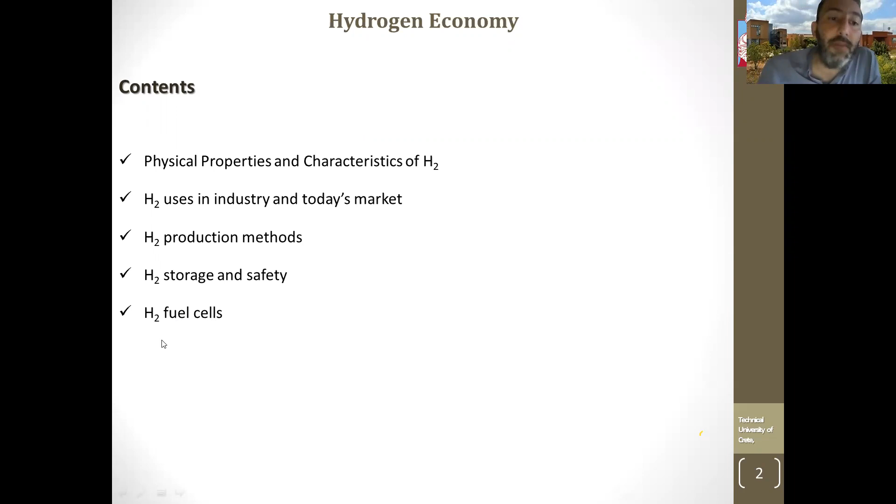So we will first begin with the physical properties and characteristics of hydrogen. We will then move on to the hydrogen uses in industry and today's market, and we will see that hydrogen is already out there. It is not something new. We will review the basic production methods, not only in small scale, but in larger commercial scales, from 2000 until now. A few things on storage and safety, which is sometimes the big concern, the big question of the safety of operating hydrogen fuel cells, and I will close with two cases.

The first is to see how hydrogen is being incorporated into vehicles. We will see a real case of the Toyota Mirai, which is an actual vehicle that is on the road in Central Europe. And also, I have included, as of a couple of days ago, the hydrogen vision in Greece that also includes our island, Crete.

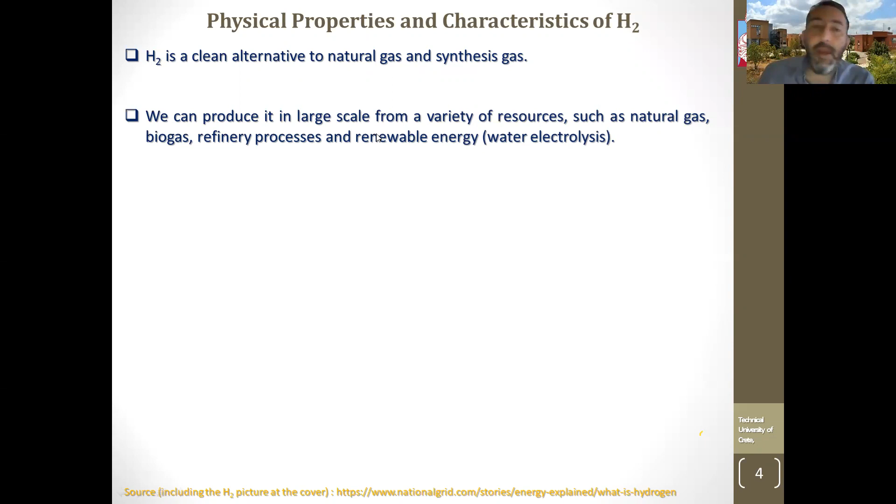So let's move now to basic stuff on what is hydrogen. Hydrogen is a clean alternative to natural gas and synthesis gas. Natural gas, we can say, is more than 90% methane, and synthesis gas is a mixture of hydrogen and carbon monoxide. Hydrogen can be produced in large scale from various sources like natural gas, biogas, refinery processes, and from water powered by renewable energy sources.

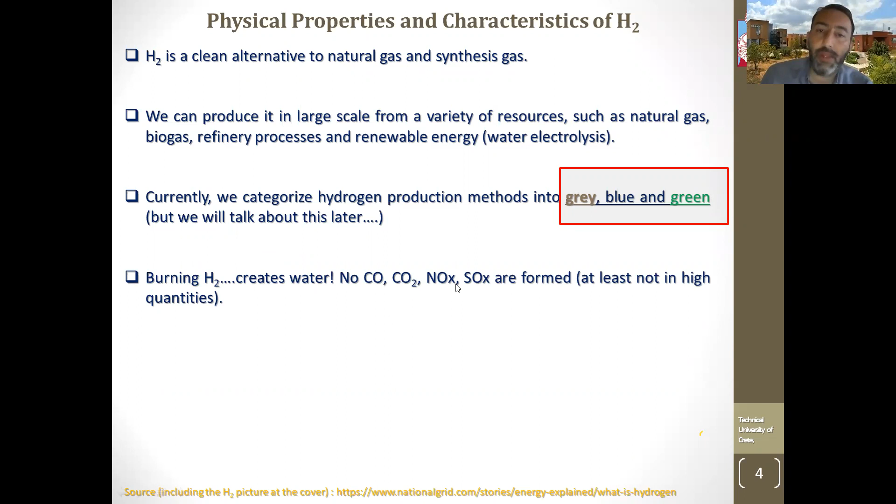Currently, we categorize hydrogen into three colors, but we will review them later. You can see the three colors here, but there are an extra 4 colors. Burning hydrogen, of course, creates water. Hydrogen plus oxygen gives only water as the main product. There is no formation of oxides of carbon like monoxide or dioxide, or oxides of nitrogen or sulfur. At least they're not produced in high quantities when we are using clean hydrogen as the main component.

Hydrogen can be transported through gas pipelines, as is the case with natural gas in big cities, in big infrastructures. However, the last bullet on this introductory slide is that economics are quite high already. Now, this is a basic picture of hydrogen that is usually taught in schools. Hydrogen is a gas. It is a light element. It has a very low density. You can see the different values here for boiling point, molecular weight, colorless, odorless, and other stuff that this type

of light gases have. Two main features for someone that starts to work with hydrogen: hydrogen is nearly everywhere. It can be found in 75% of all normal matter, but you cannot find it alone. You cannot, for example, open a cave or a house, I'm kidding, and find hydrogen. Hydrogen is found only in other substances. It is inside water, methane, methanol, gasoline, ethanol, diesel, alcohols, and all hydrocarbons.

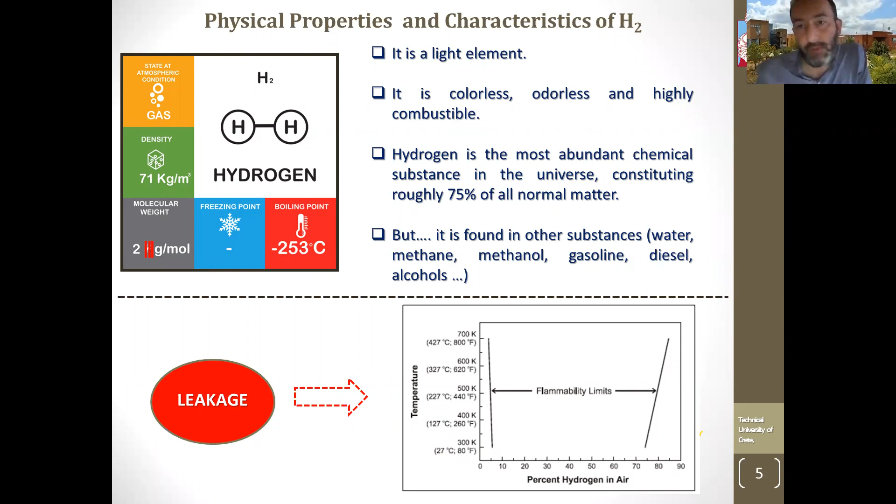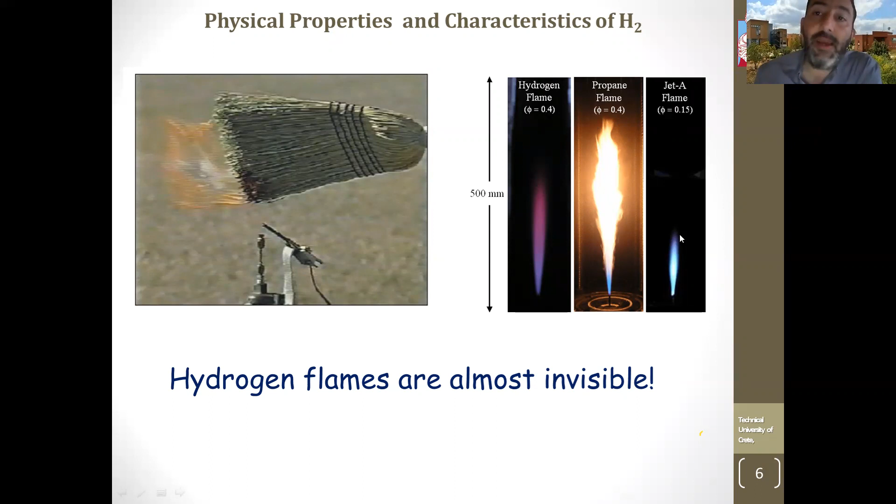compared to the percentage of hydrogen. So in order for an accident to happen, we need to put hydrogen in a very small place where it will increase in concentration. So we should not be afraid all the time about hydrogen leakage. Of course, this doesn't mean that we should not have any safety measures. Here are two examples of hydrogen flames. You can see that it is almost invisible. Here I have a hydrogen flame on the left, a propane flame, and a jet flame. Hydrogen flames are something between propane and jet fuel aviation flames.

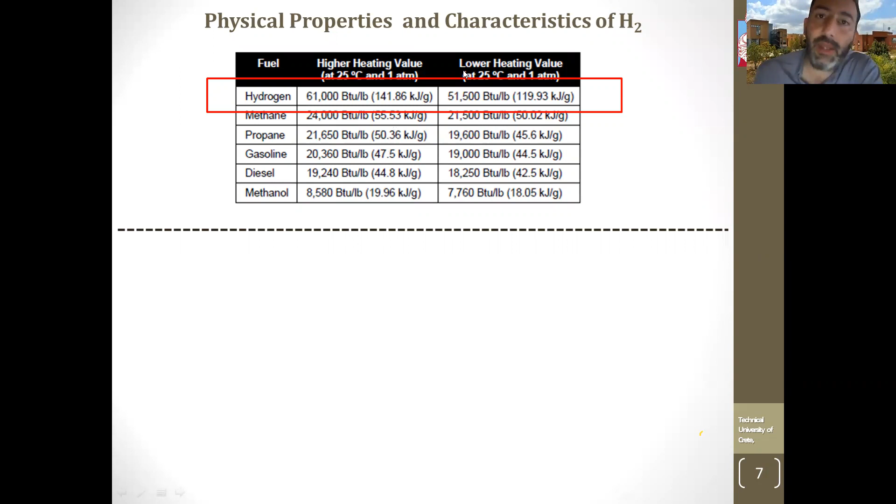So let's see some characteristics of hydrogen compared to other fuels. I have selected hydrogen to be compared at the higher heating value and lower heating value as kilojoules, energy per gram. In the bottom half of the slide, I will show the same table regarding density. If I take the energy per gram of hydrogen, it is the highest value, either higher or lower heating value, compared to methane, propane, and more importantly gasoline and diesel, the main fuels for transportation. The difference is more than 3 times.

If I now compare the energy density of hydrogen, meaning energy per cubic meter, hydrogen has a very low value compared to gasoline and diesel. These two motor fuels are about 30 million kilojoules per cubic meter, while hydrogen goes up to 4.5 million kilojoules per cubic meter, only if it is compressed at about 690 barg. And this will be the case with vehicular applications.

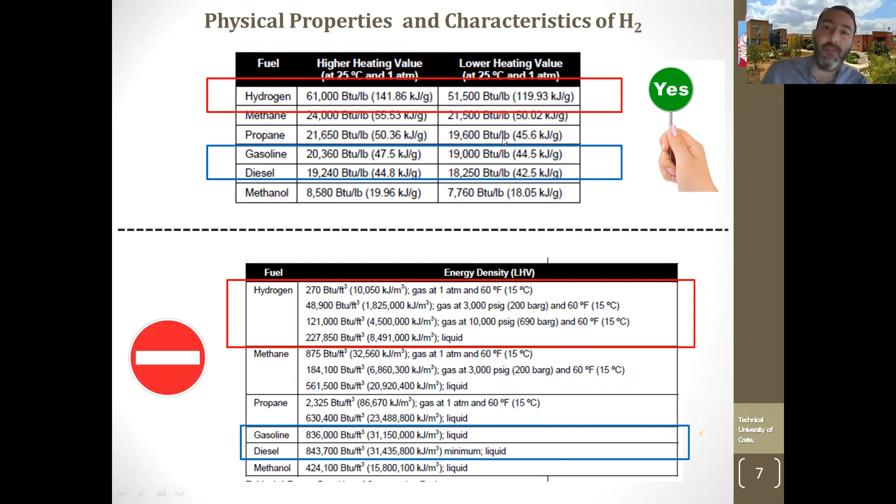In order to have hydrogen in vehicles, I must have a tank filled with hydrogen at a pressure that reaches 690 barg. Even in this case, gasoline and diesel, which are liquid fuels, have higher energy density. So if I have to compare something per mass, hydrogen receives a good credit point. Now, if I want to compare, I will put this somewhere around here.

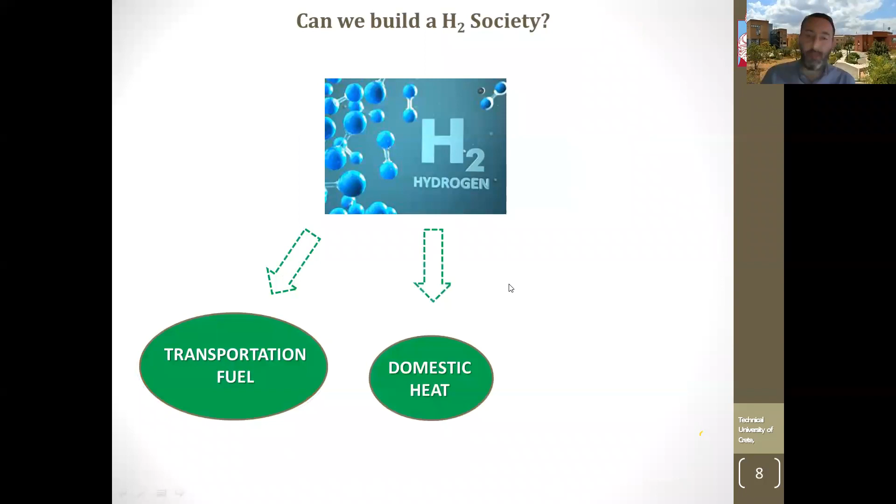If we need to build a hydrogen society, we must consider hydrogen to take part as a leading role in 3 different things. Hydrogen should be used as transportation fuel. It should be used as an energy medium or a heat medium for domestic heat supply. And also it should be used as the main component, the raw material, to provide high added value chemicals.

So in order to build something that is called hydrogen society or hydrogen economy, hydrogen should take part in all of these 3 sectors: transportation, domestic heat, and also industry, chemical industry, refineries, and so on.

In this way, if we can manage to build this hydrogen industry, we will first start with the production of hydrogen, and these are different types of pictures that we will explain later. Hydrogen should be produced through an economic way, for example, through renewable energy sources.

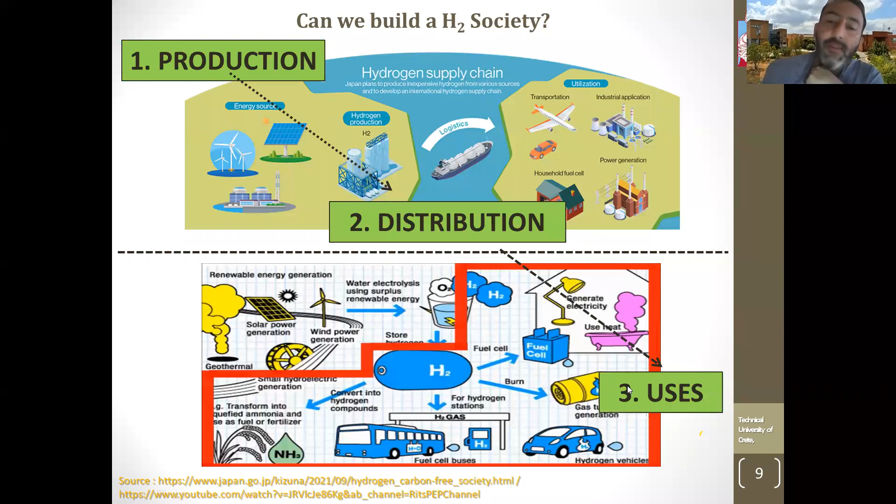It will be stored, and then it should be distributed either through tanks, big trucks, or city pipelines, transported in order to be used in these three sectors that we discussed: transportation, industrial, household, and so on. So a hydrogen society should have production, distribution, and uses as actual roles for hydrogen.

What are the main hydrogen uses in today's sector? We start with power and heat generation. It can be used for power generation to supply energy and power to the grid. Hydrogen addition to natural gas, for example, blending hydrogen into natural gas pipelines.

From what I have heard, because I'm not an expert, 5 to 10% of hydrogen can be introduced to the gas pipelines. And this hydrogen can provide heat for buildings and industry.

In industry now, it is used for ammonia production, steel production, synthesis gas, and refinery processes dealing with hydrodesulfurization, hydrocracking, hydrogenation.

And as we will discuss at the end of today's lecture, it can be used in hydrogen vehicles. Currently, but this number is increasing, this accounts for about 10% of global hydrogen consumption if I take into account the energy production.

Now here is a spider diagram that I found on the internet, and I really like to use. We see here at the heart of this diagram the hydrogen. At the beginning, as we said, we need to produce hydrogen. We have, for example, renewable sources, nuclear power.

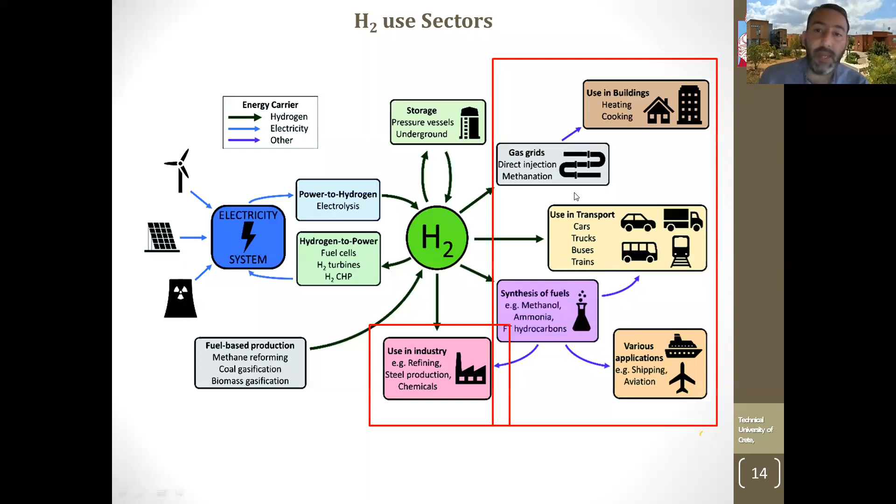We can take hydrogen from methane reforming, coal gasification. We'll take a minute to see what these processes and technologies refer to, hydrogen electrolysis and so on. Storage either in vessels, in liquid form, gaseous form, or in metal hydrides. And then we have the uses in buildings, gas grids, transportation, synthesis of fuels, and so on.

Here, based on what we discussed earlier, are some numbers regarding the potential hydrogen production starting from 2020 and for the next 30 years. Governments, the European Union, and some other global organizations say that in 2050, we will have to build a society that will be net zero, meaning no carbon emissions.

You can see different sources of the material that I've been using in this lecture, so you can also check some other numbers. We can see here the different colors as they refer to refining, industry, transport, and so on, that will increase the hydrogen demand over the next 30 years.

These are two scenarios. The right-hand side refers to no carbon emissions, while the left-hand side means that we will have some carbon emissions, but as little as possible. And we can see that in both scenarios, in order to achieve this low or net zero emission, we need to increase hydrogen production, and not only increase hydrogen production, but use hydrogen in these different sectors that we can see.

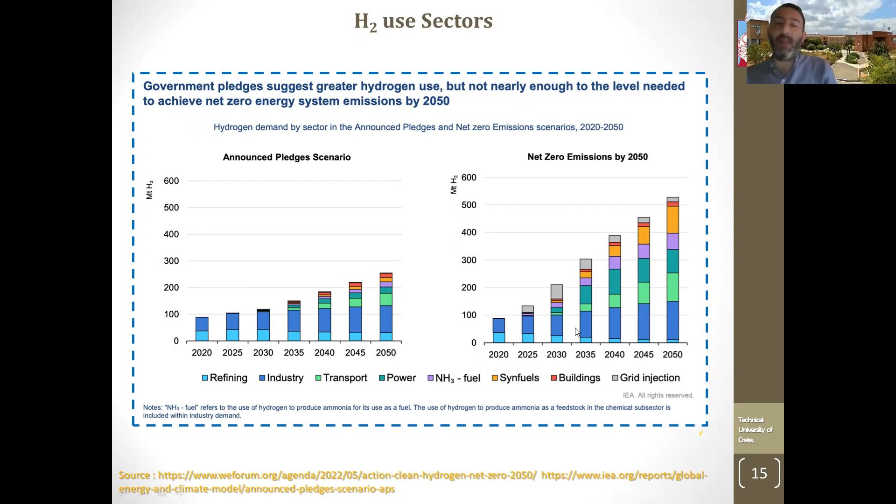Now let's see if hydrogen can be used in more fascinating applications, like hydrogen in space, in islands, or even in a laptop.

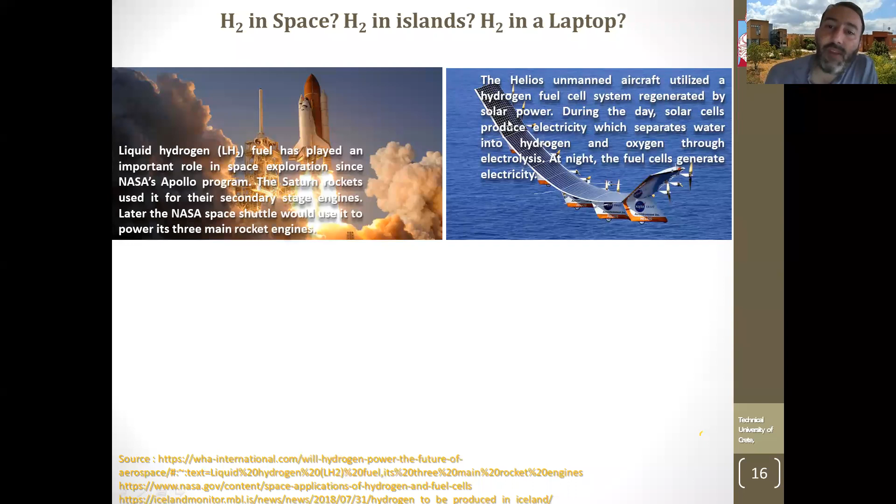Now, this is very strange, it looks like a big bird. This is the Helios, from the Greek word describing sun, an unmanned aircraft that utilizes a fuel cell system powered by hydrogen, and this hydrogen is provided by solar power. So during the day, solar cells can operate this unmanned aircraft, while at night the fuel cell can generate electricity with the hydrogen that is being produced.

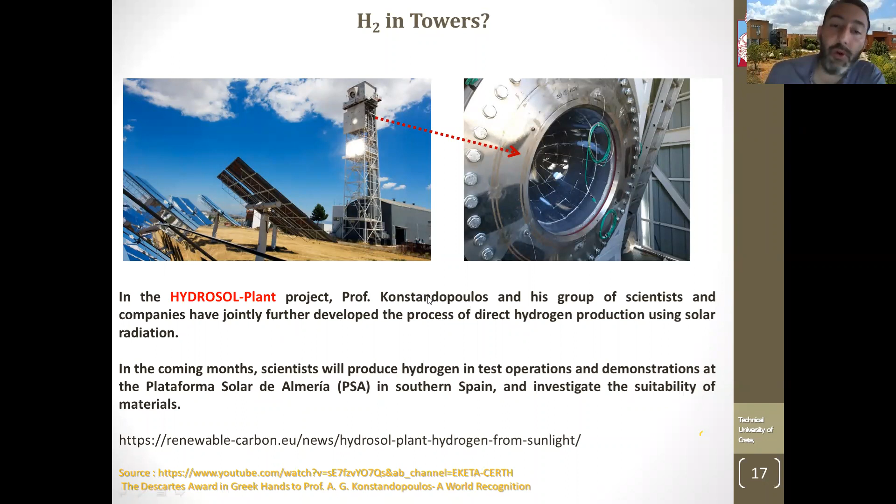It is a very efficient way to produce hydrogen from solar water splitting. And this plant, the hydrosol plant, you can see the different details here, has received numerous awards for Professor Konstandopoulos, a Greek professor in Thessaloniki. Other sectors include food, metalworking, welding, float glass, medical, and so on.

Now, let's go a bit quickly over the hydrogen production routes. And I say quickly because if we needed to stay at each of these technologies, we may need one seminar alone. Steam reforming is the basic hydrogen production route. Methane and water are put together in an endothermic reaction to produce CO, CO2, and hydrogen. This is the main hydrogen route, I'm repeating, for today's market.

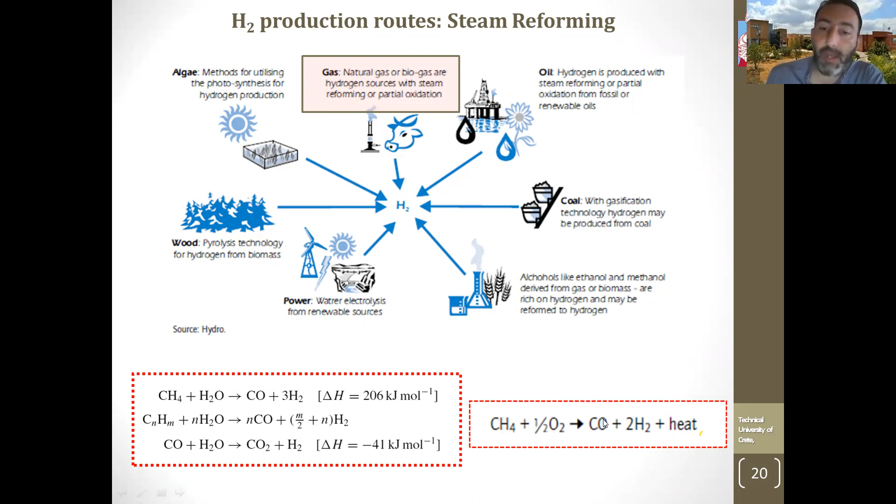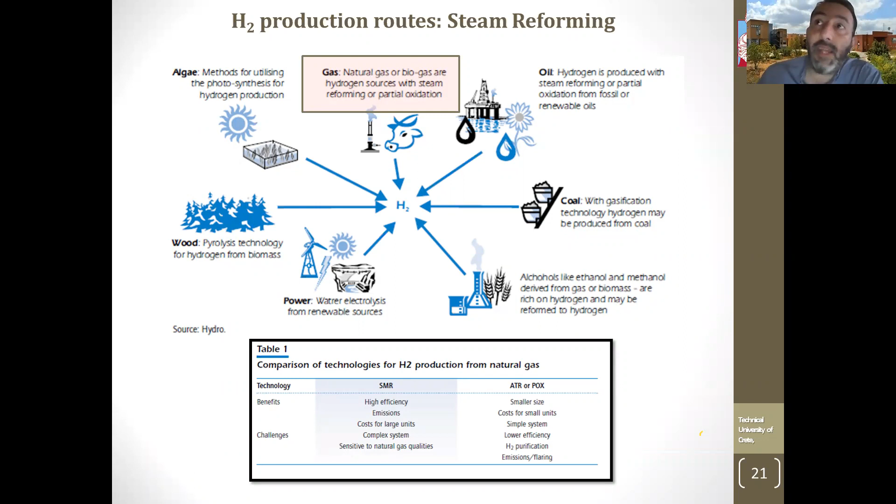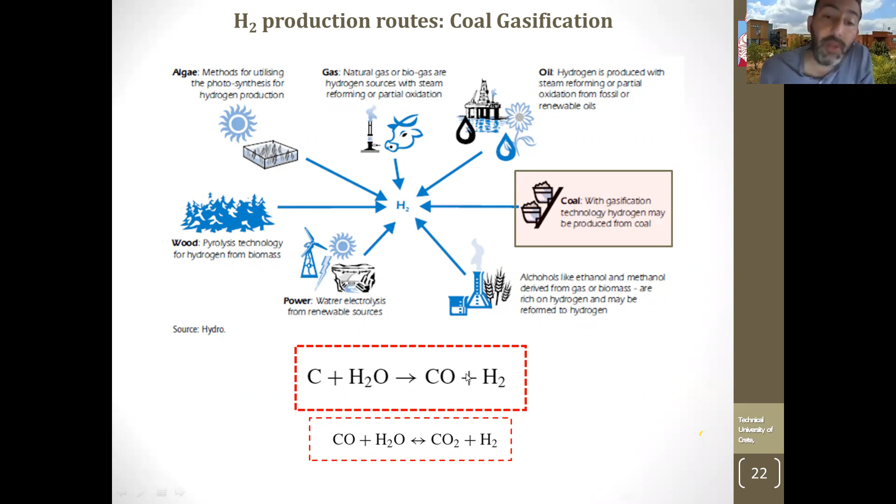An alternative is the partial oxidation of methane that provides CO and hydrogen, and of course it is an exothermic process. Here are some very few details. Steam reforming takes place commercially, at large scales. It is something quite known. It is a catalytic process, so a lot of effort, a lot of research is being done there on providing good catalysts. Coal gasification is another way. Coal, besides other components, has a big percentage of carbon. Through water, coal gasification can lead to CO and hydrogen as well.

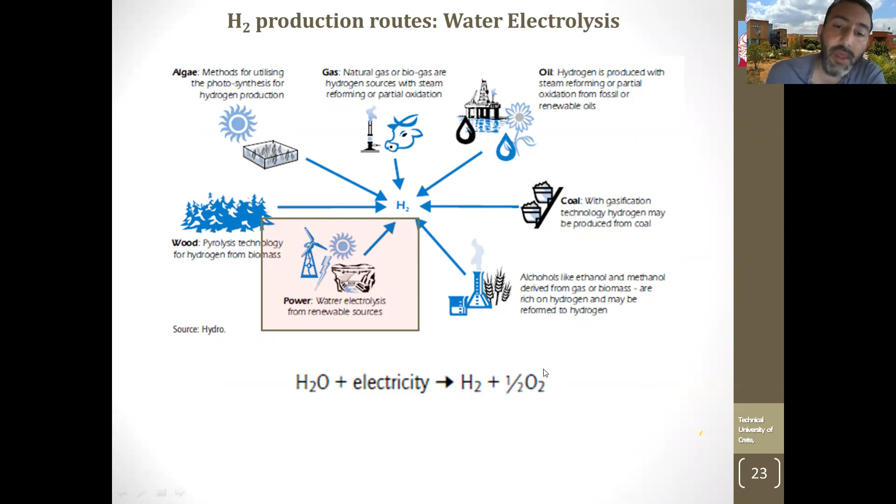Power electrolysis is, let's say, the green process where water and electricity are combined in order to provide hydrogen. You can see that there are no emissions besides oxygen. Now, for an electrolyzer, I will say a few words, if you don't mind. An electrolyzer is an electrochemical machine or an electrochemical reactor. It has two compartments. I will start with the proton exchange membrane. We have the anode, the membrane, and the cathode. Water, through the provision of electricity, you can see the reactions over here at this table.

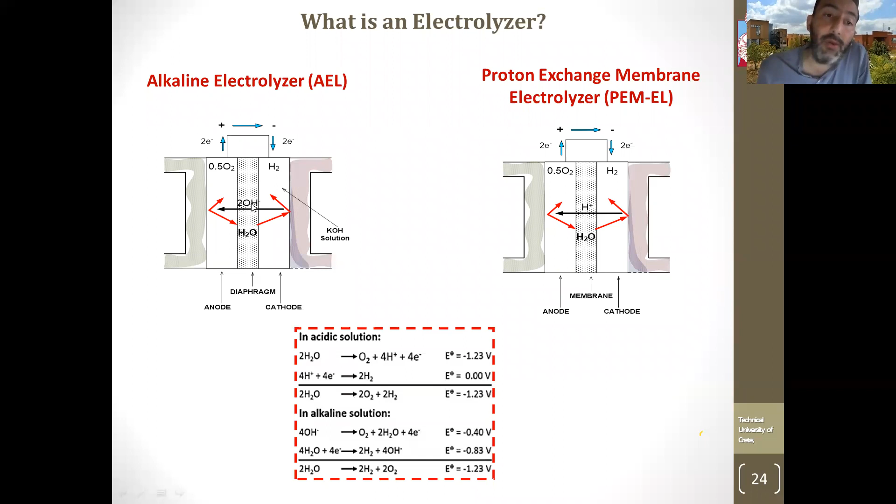Water is split into hydrogen and oxygen in the form of ions, protons and oxygen ions. Through the membrane, only the protons can pass to the other side. And of course, I need electricity in order to split water into these components. The difference with the alkaline electrolyzer lies in the membrane, this diaphragm that allows the hydroxide ions to pass from the cathode to the anode. So this is the main way to produce hydrogen from renewable energy sources.

So if I have an electrolyzer with water inside, I can power the electrolyzer, split water into hydrogen and use it. Another renewable energy source can be, for example, wood or other things that are thrown away in the agricultural industry. And pyrolysis, I have used the example of methane. Pyrolysis means that I provide heat only, without air, and split components, for example into carbon and hydrogen in the case of methane. In this way, pyrolysis is like splitting a component into its main constituents.

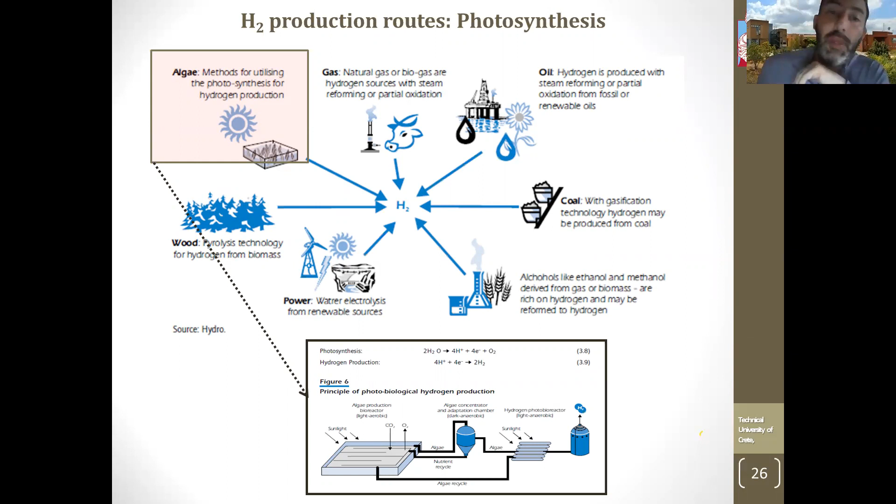A very futuristic and fascinating hydrogen production route refers to photosynthesis for hydrogen production through biological processes. This is still in progress, but if some of you have more interest in this process, you can review it in the numerous videos that exist. It is a good technique, however, it still needs a lot of time to develop and provide a commercial application.

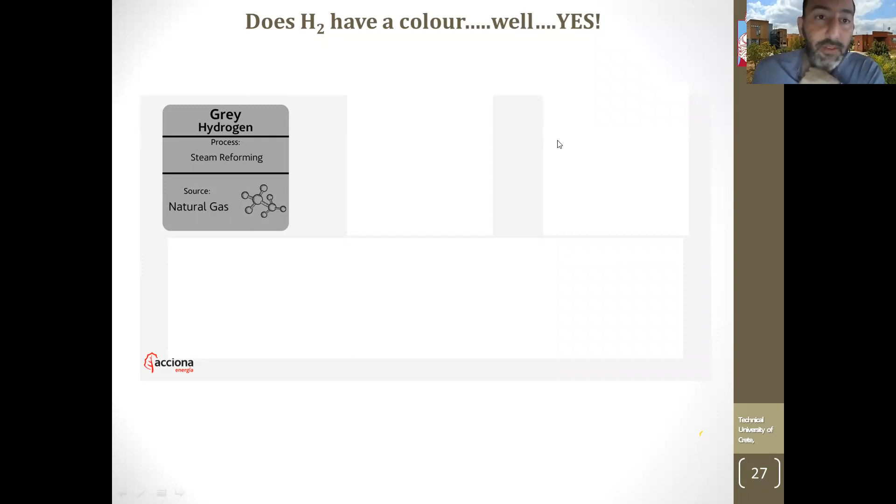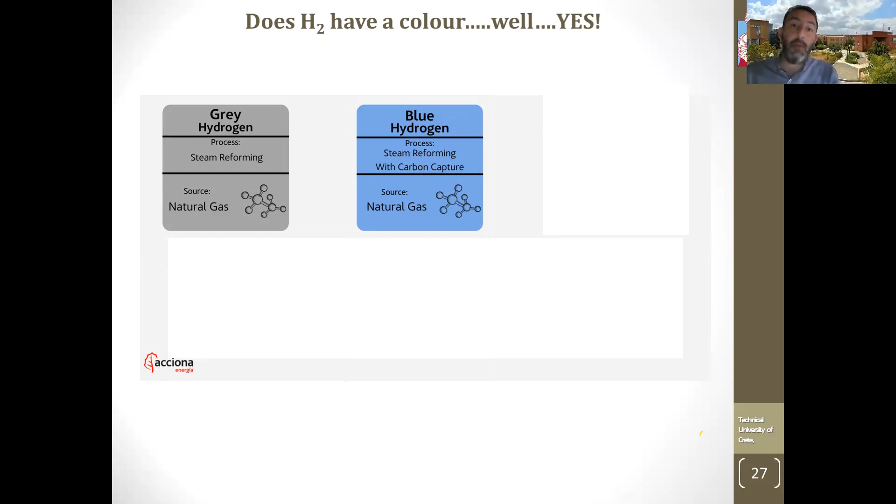Here we have the different colors of hydrogen. Does hydrogen have a color? Well, the answer is yes. We have gray hydrogen when hydrogen is produced from natural gas steam reforming. When it is produced from steam reforming but the CO2, the carbon dioxide that is produced, is captured, then we are talking about blue hydrogen. And green hydrogen comes from the process of electrolysis powered by renewable energy sources.

Now, for every kilo of hydrogen produced, more than 10 kilos of CO2 are being emitted to the atmosphere. So this means that with gray hydrogen production, I emit a lot of CO2 to the atmosphere. Also, if I use gray hydrogen production, this means that I will use natural gas, which is quite expensive, at least the last 12 months for different geopolitical reasons. We can say that natural gas prices have increased. 1 kilo of hydrogen requires more than 4 kilos of natural gas. So if we need to proceed with a hydrogen economy, my opinion is to move to blue and green hydrogen.

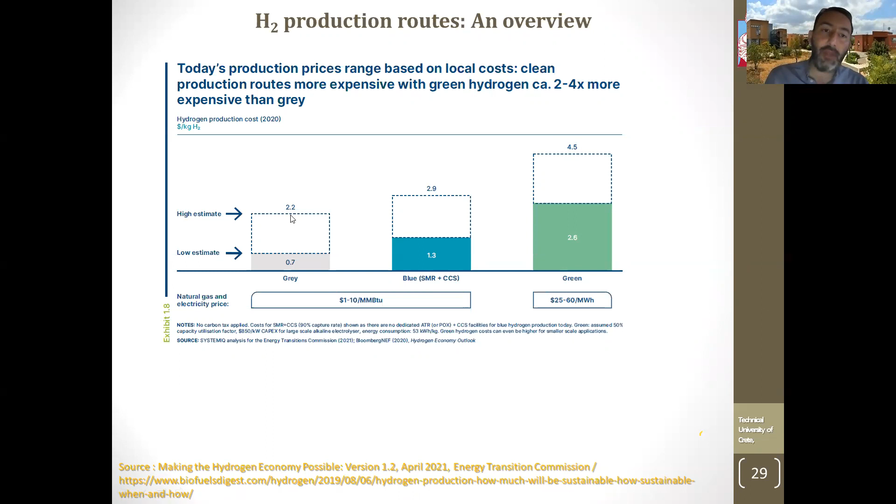And here are some cost relations to the processes that I referred to. We can see here that gray hydrogen is about $2 per kilo, and this refers not to the actual production cost, because there are also other costs regarding transportation, storage, and so on. This is, let's say, a basic production cost from the gray process, $2.2, 2.9 if I include carbon capture and storage, and 4.5 if I move to the green process powered by solar and wind energy. So we can say that we need to spend at least 2 to 3 times more money in order to move from conventional methane reforming to green hydrogen production.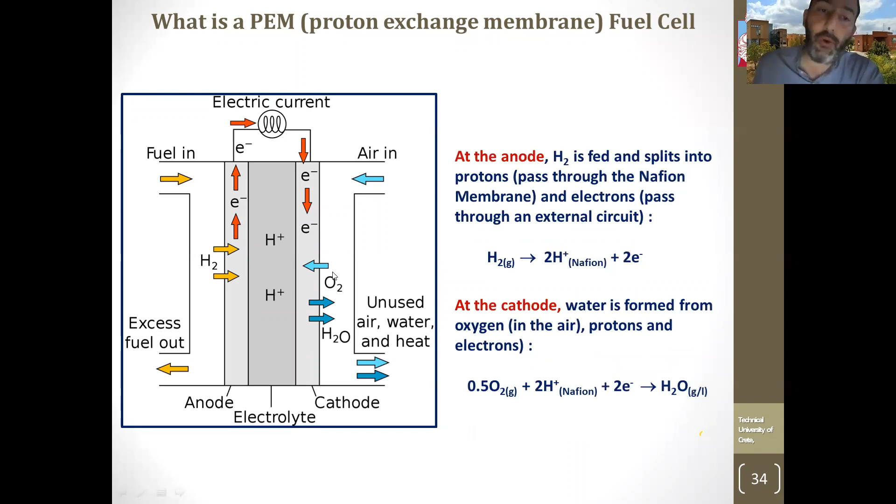I need a couple of slides to make an introduction to the PEM fuel cell, because I will use this technology, which is the reverse of the water electrolyzer, because I will move to the case of the Toyota Mirai. Now, what is a fuel cell? In the fuel cell, again, I have the electrolyte, the anode, and the cathode. Here, I provide hydrogen to the anode. Hydrogen is split into hydrogen protons that can pass through the membrane to the other side, where there is the supply of air, and electrons pass through an external electric circuit. Passing electrons, moving of electrons, transportation of electrons, we can use any other word, means that I have electrical current. Electrical current means electrical power or energy production.

This is what happens at the anode, the splitting of hydrogen into protons and electrons, and this is what happens at the cathode: oxygen, along with protons and electrons, provides water. So from one side, I have hydrogen, from the other, I have air, oxygen is included in the air, and what do I take at the outside? Water, which is, let's say, quite a peaceful product, and also electricity.

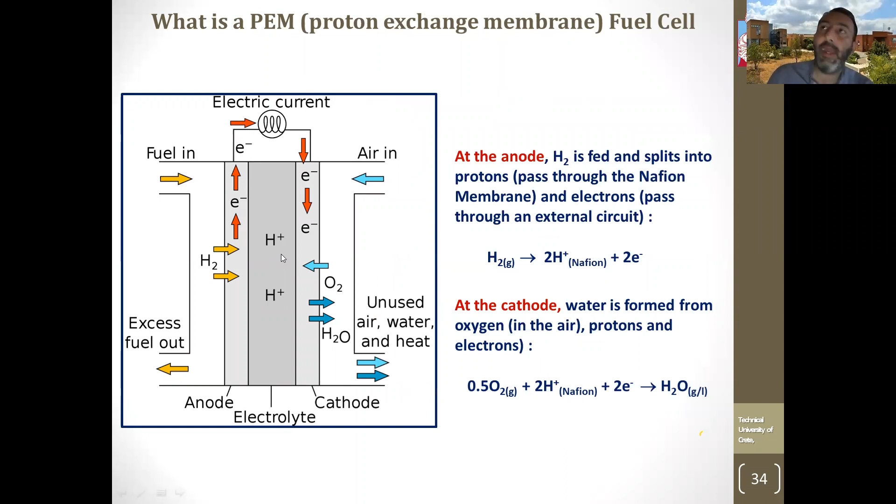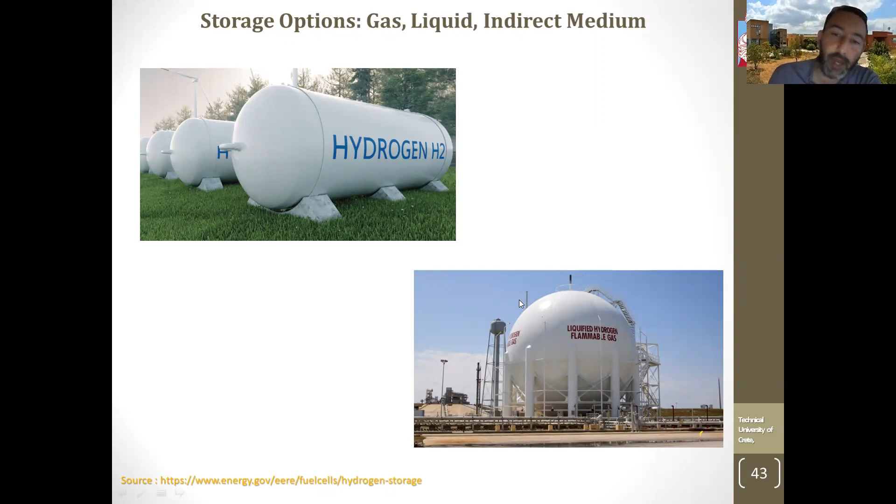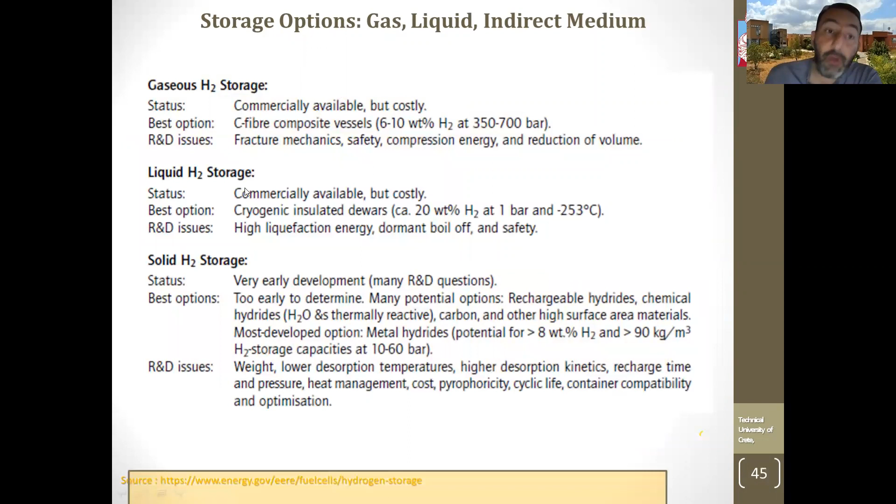Here is what hydrogen storage looks like in gaseous form, and this is how hydrogen is being stored in liquid form. Some, let's say, comparison between gaseous, liquid, and solid hydrogen storage. Basically, the gaseous storage is commercially available. For the liquid storage, we can find it commercially, but it is still costly. We need very good insulation dewars. These are the dewar tanks, as they are being called.

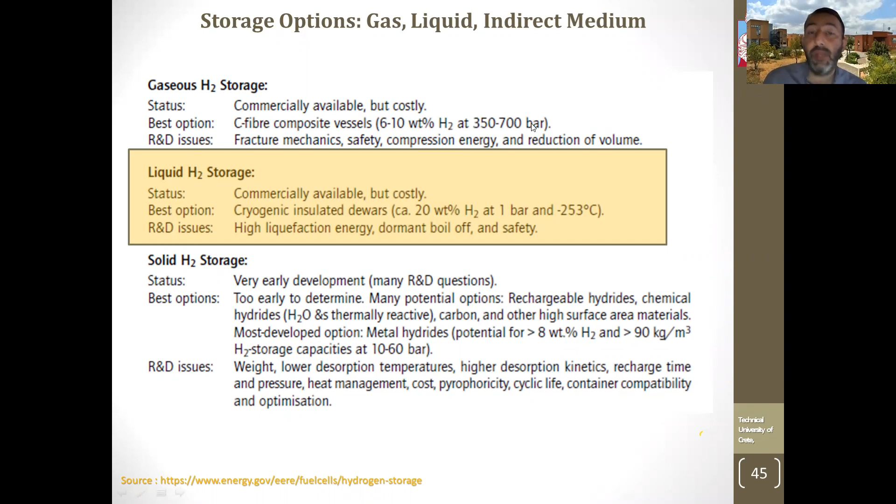Here you can see in the first case that hydrogen is being stored up to 700 bar. Here you can store it at atmospheric pressure, but at very low temperature. And this is something that I said earlier, that we are, let's say, in R&D development. There are a lot of things to do in order to make it public.

So after this introduction, I have given you, I know, a lot of details, but I have not gone very far into details for the different technologies. So I have selected something that I think that you will like. This is an actual car that is not under design, but it is operating, as I said in the beginning, in Central and Northern Europe.

This is a Toyota Mirai, which is a fuel cell vehicle that uses hydrogen as the main fuel, the energy medium that generates electricity and powers the vehicle. We will see everything that we need to know inside this car. This information is not classified. You can find it on the internet, and I have here the manual for you to review it.

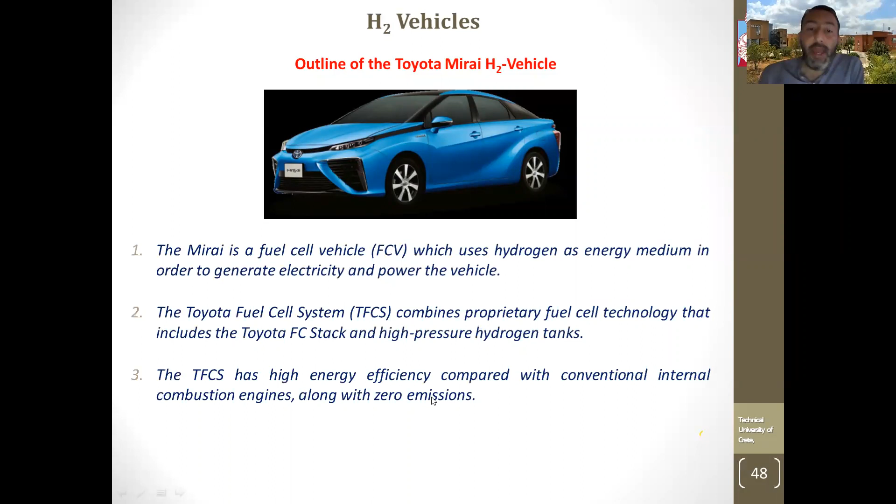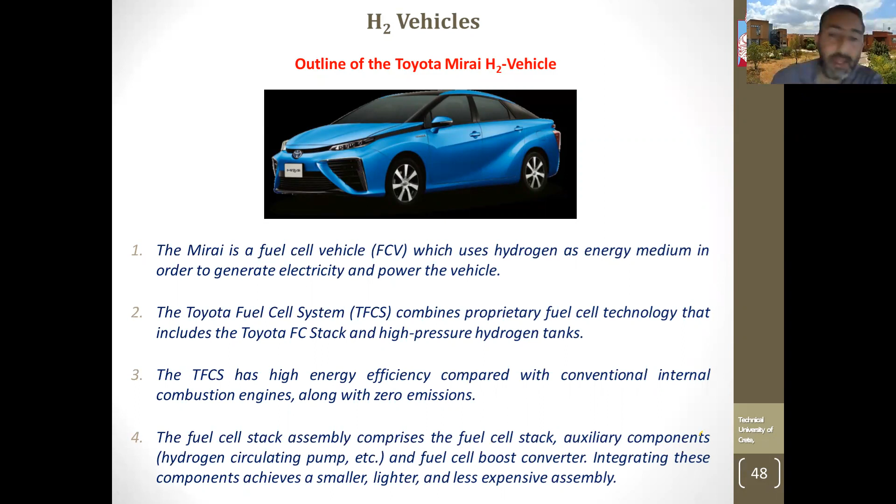Underneath the seat of the driver is the fuel cell stack, which gives a maximum output of 155 horsepower, if you need to compare it with actual values of your car, your parents' car, your friend's car, and so on. So underneath the seat of the driver is the fuel cell.

The motor, as in conventional vehicles, is in the front of the car. This is an electric motor because it is driven by electricity provided by the fuel cell. It is an electric car. It is not operating on batteries, as we know, for example, Tesla and many other vehicles operating with batteries. This car operates with hydrogen and an electric motor.

The battery is at the back side, down the passenger's seat. It is a NiMH, a nickel metal hydride battery, that has the same application, stores energy and receives energy during the braking of the car. Of course, since we have an electric motor, we need some boost converters in order to increase the voltage provided by the fuel cell, and also some control units, because it is a very expensive car. We need to take into account humidification, how oxygen and hydrogen are being supplied to the fuel cell.

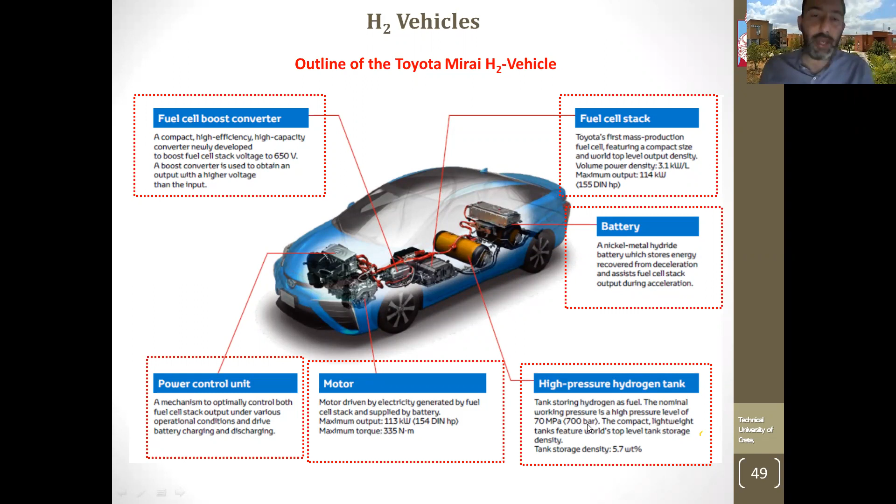How this car operates: we start with step one. Air is being introduced through these holes in the car, goes up to the middle of the car, inside the fuel cell. Here is the fuel cell stack. Here we have the hydrogen pressure tank at the point that I mentioned earlier. So hydrogen and oxygen are being combined in order to provide power, electricity to drive the motor, along with electricity from the battery or to the battery. And how hydrogen is being refueled, we will see later. And the last part is what is emitted from the car, which is basically pure water.

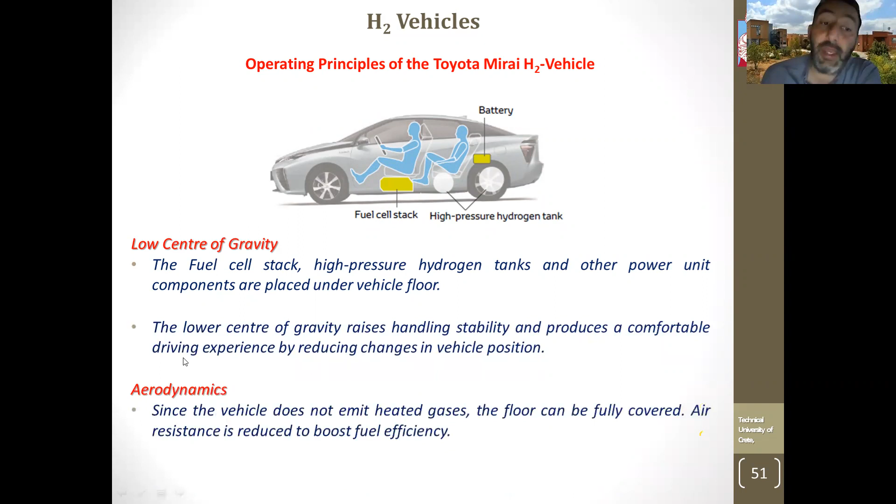As Toyota claims, we can see how the inside now looks with two passengers. This is the battery, the hydrogen pressure tank, and the fuel cell. It provides a low center of gravity. It has good aerodynamics.

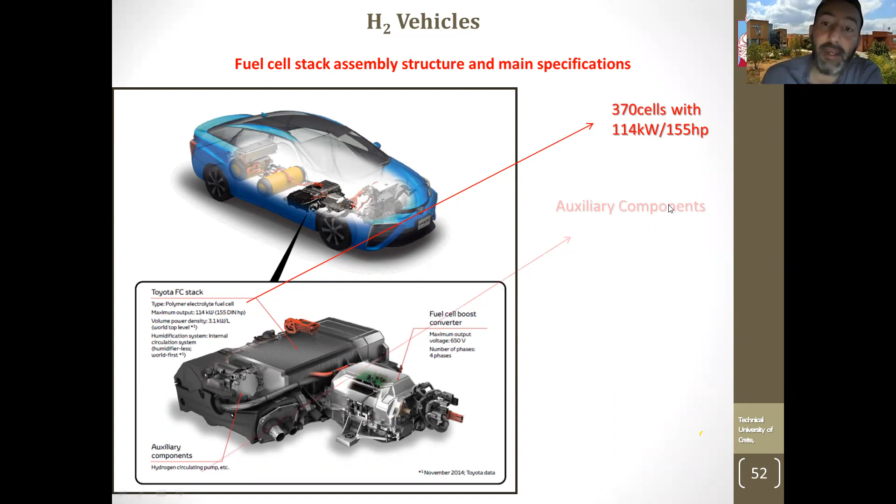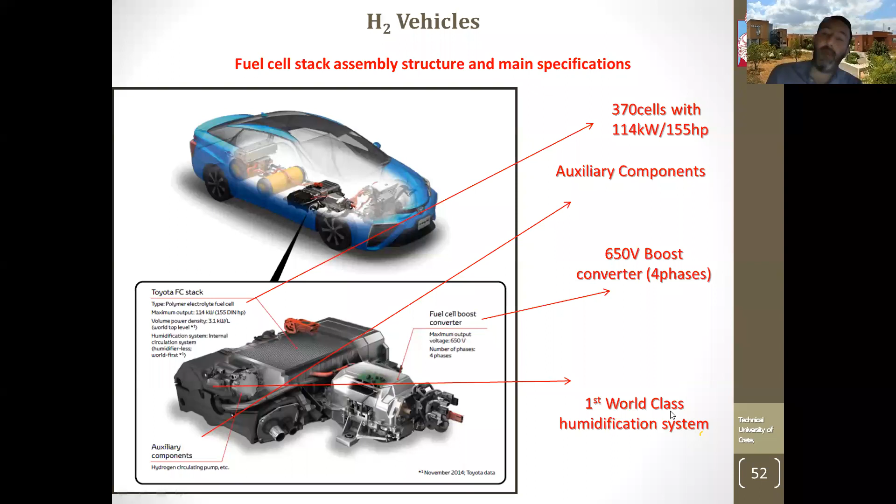The technology of the fuel cell has gone a long way. It is one of the, let's say, best technologies of fuel cells in cars. 370 cells, giving a horsepower of 155. And here also some auxiliary components like pumps, circulators, converters, and so on. And it received some awards as first world class in humidification.

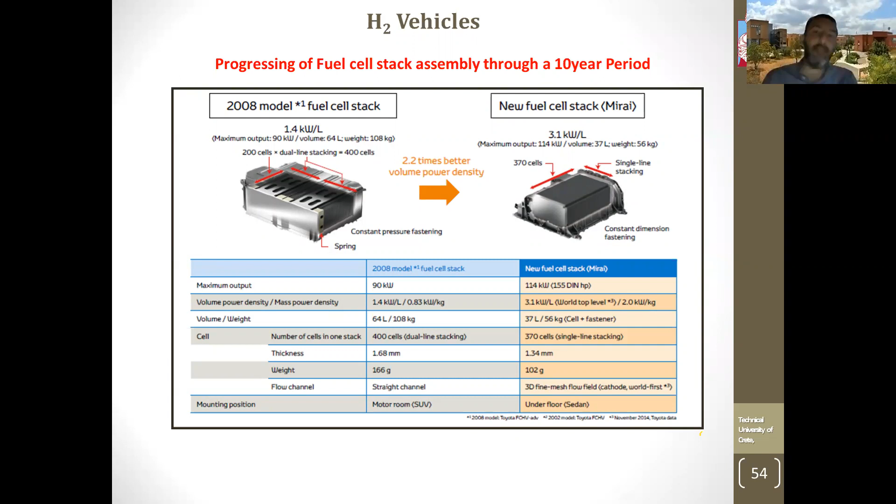Toyota has worked for more than 20 years on building this car, starting from early 2000 up to 2016 or 17. Here is different information regarding what has changed from the 2008 to the 2018 model. It is lighter, the fuel cell is lighter, it provides more power, it is more efficient, it is better than the first, let's say, version.

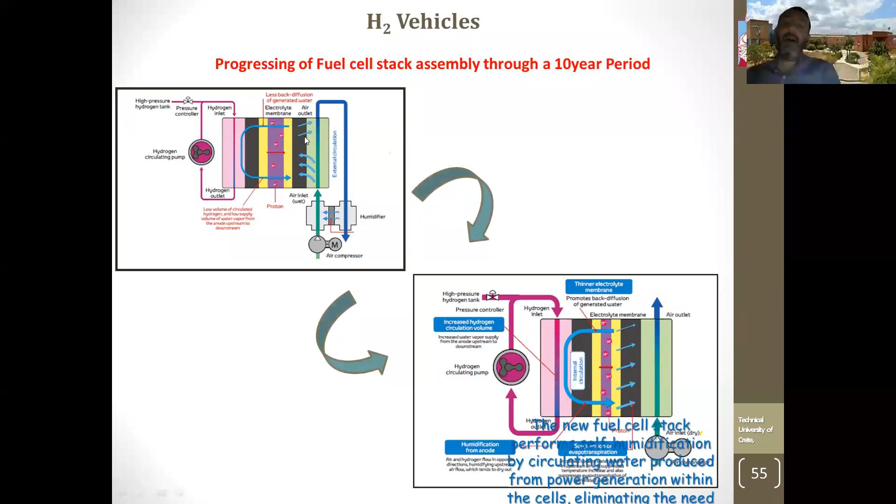Here is how the operation inside the fuel cell works. We discussed the membrane, the oxygen and the hydrogen inlet, basically the same principles as more than 10 slides earlier that we discussed.

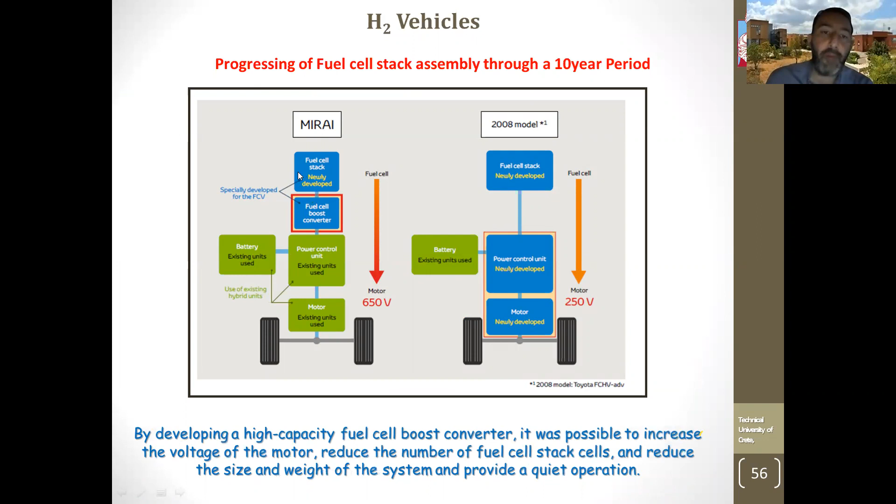Here is something also describing what has changed from the 2008 to today's version. We can see that it is more efficient if we have the fuel cell here, the boost converter, the motor, and the battery operating in a better way than the previous model.

Now, if we need to fill hydrogen in a hydrogen fuel cell station, the refueling time is about 3 to 4 minutes, which is actually a low period of time. If I have an electric car and I need to go from Thessaloniki to Athens, I will need to stop about 2 to 3 times to charge my vehicle and spend at least 30 minutes per charging. With hydrogen cars, I can go from Thessaloniki to Athens with one full tank.

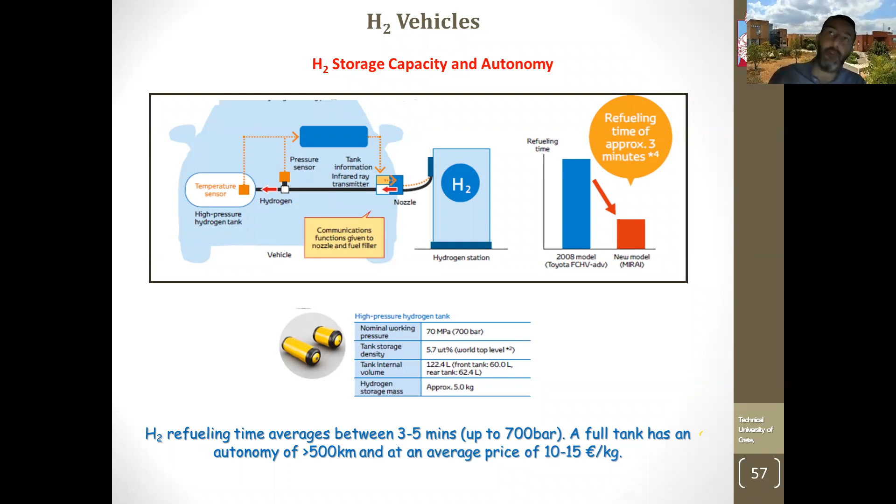One full tank of this vehicle has about 4 to 5 kilos of hydrogen that gives an autonomy of more than 500 kilometers, which is the distance between Athens and Thessaloniki. And we will see the average price is about 60 to 70 euros for fueling my new hydrogen vehicle. The hydrogen vehicles, as these figures describe, can start at very low temperature, especially in countries like Canada and Northern Europe.

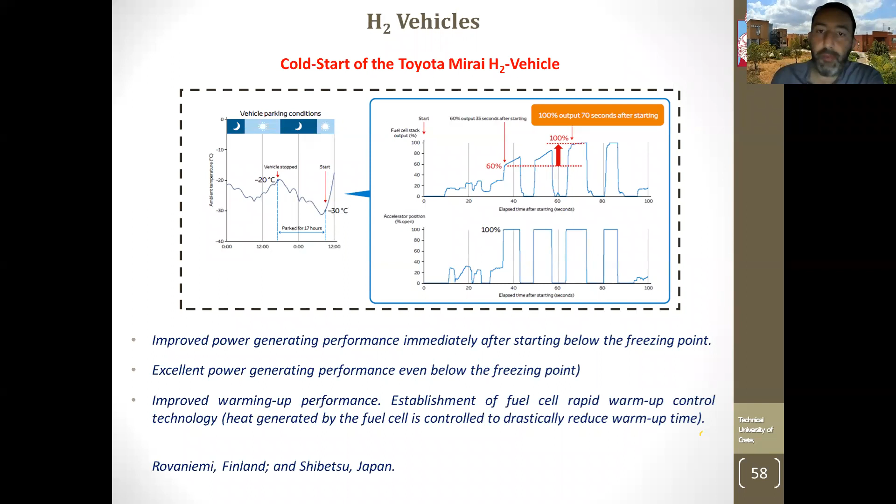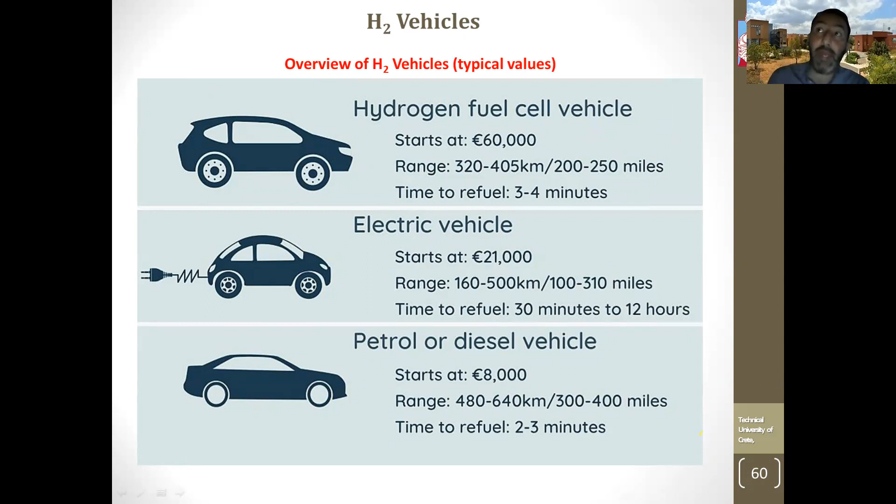In my opinion, if you ask me, I don't think that hydrogen vehicles need to replace electric vehicles. In my opinion, hydrogen and electric vehicles can replace petrol and diesel vehicles. So both of them are needed towards building a green society. Other cars are the Hyundai Tucson, Honda Clarity, and also Hyundai Nexo. You can see what each company provides to the driver.

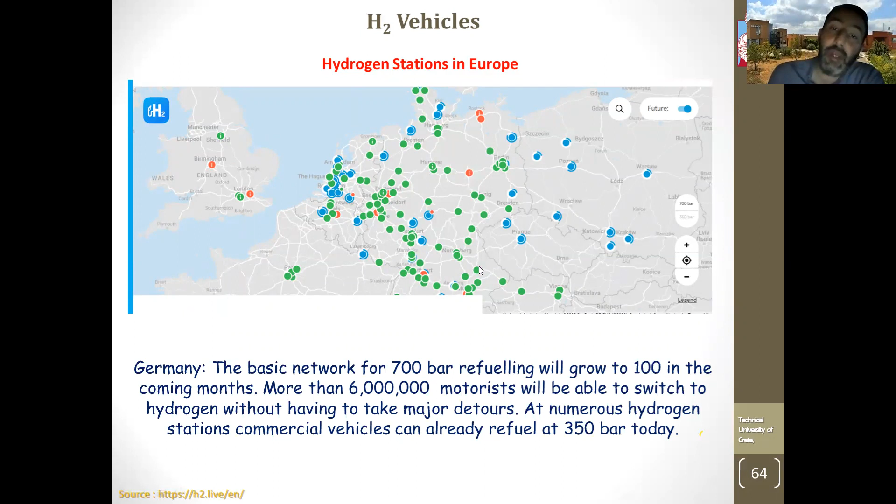Here is an overview of Europe; in green are actual hydrogen stations. We have in Europe more than 100 hydrogen stations, most of them in Germany, that can refuel your hydrogen vehicle at 700 bar. In the upcoming months, the European Union claims that more than 6 million vehicles will be able to switch to hydrogen, and you can fuel your hydrogen vehicle at these stations. Of course, we need more in order to provide hydrogen vehicles to the world.

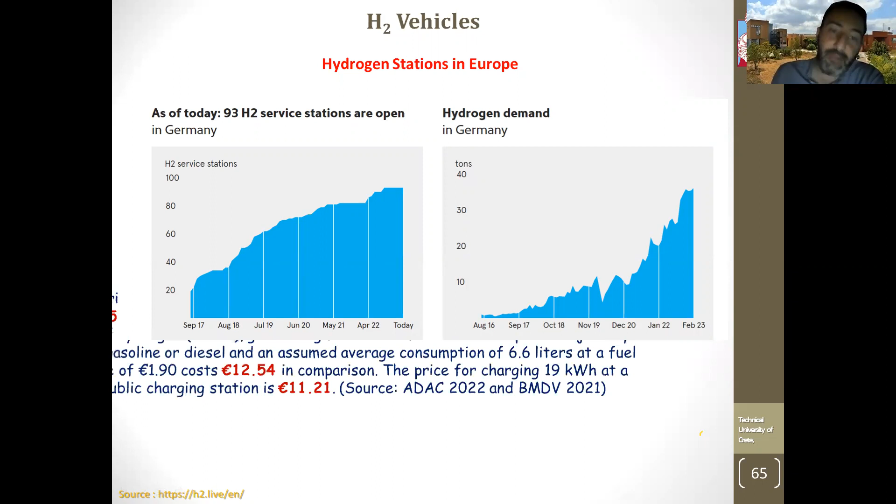If someone asks if hydrogen will still be used in the near future, I have the example of Germany, which is a country with a good economy, and we can see that they have an increase in hydrogen service stations and also a tremendous exponential increase in hydrogen demand in Germany. So this means that hydrogen will be alive for the next decades, as these numbers claim.

So the price for filling in a hydrogen station is about 12.85. So basically, more or less, it's the typical value that I would give for refueling my gasoline car. And closing, I will give two slides regarding the hydrogen vision in Greece.

As the General Secretary for Energy, Ms. Alexandra Sdoukou, stated a couple of months ago, with the EastMed gas pipeline, the EU hydrogen supply backbone can be provided in the long term. In 2040, there are strategies for building hydrogen facilities powered from renewable energy sources that will give an income of more than 1.6 billion euros per year. So this is a good number.

Hopefully it is correctly calculated, and some others say that in 2050 we will have a return of 10 billion euros per year only from hydrogen production. A big project that is underway is the White Dragon in Kozani, Western Macedonia.

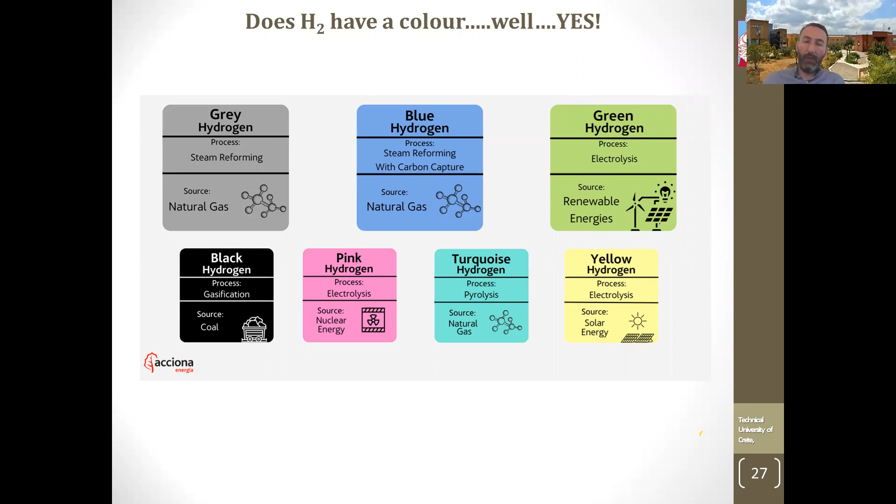So biomass is considered a renewable energy. So if biomass gasification or biomass pyrolysis is being used, they can say that it is green, powered from renewable sources, which includes biomass. The different colors for gasification and pyrolysis strictly refer to the sources of coal and natural gas, which are fossil fuels. So I haven't seen something describing only biomass-powered production for hydrogen. Okay, thank you.

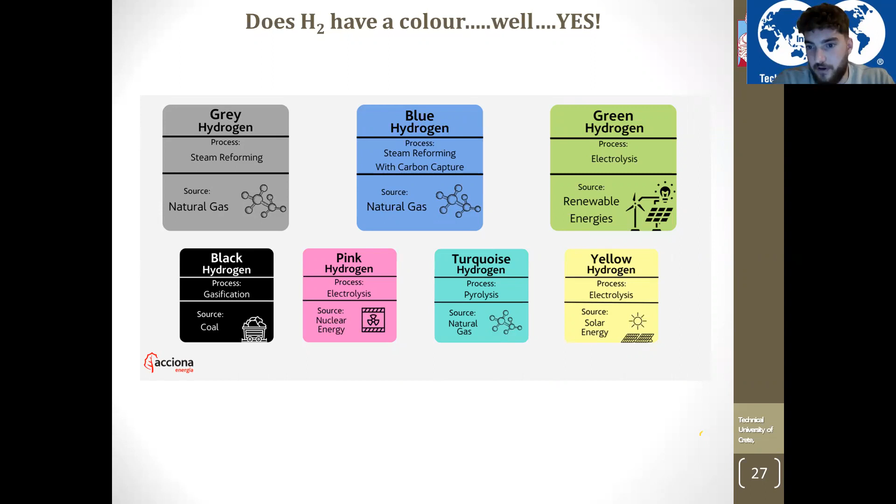The next question. Currently, does it cost more to refuel a car that uses hydrogen or a conventional one? Okay, we can make the calculation together. Now, a hydrogen car needs 5 kilos of hydrogen. A full hydrogen tank requires 5 kilos of hydrogen. Times 12.85, you can make the calculation. I think it's about 65 euros, right? So 65 euros in order to fully charge my hydrogen car.

My gasoline car, which is a Toyota, by the way, needs about 50 liters of gasoline, with a price of 1.9, I need about 95 euros for the same autonomy on the road. So a hydrogen car requires less money to be fueled, but requires 2 times more to buy it. So if you make these calculations, you can see how much fuel you will require and see if your investment in a hydrogen vehicle will pay off over the next years.

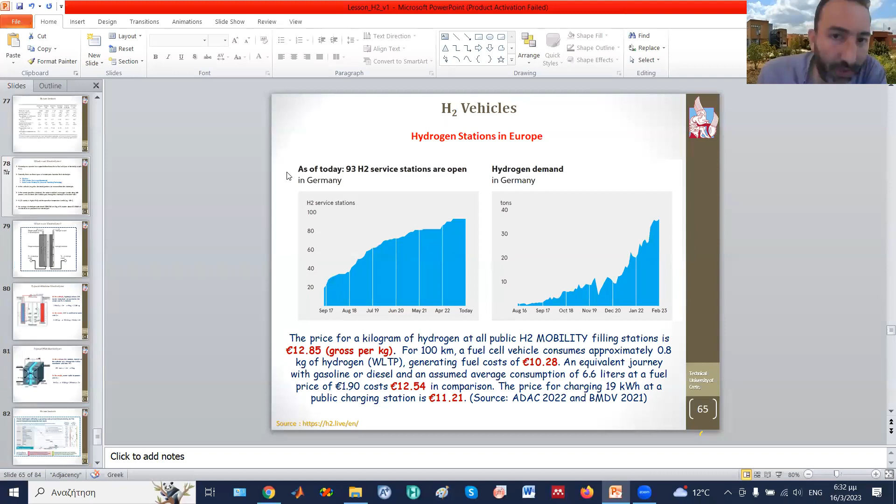I would like to ask a question about the safety of the hydrogen tank, which is at the pressure of 700 bar, in the event of collision. Okay. Thank you for this question. Can I use a video for that? Yes, of course. Okay. I think this explains everything. It's a 1 minute video.

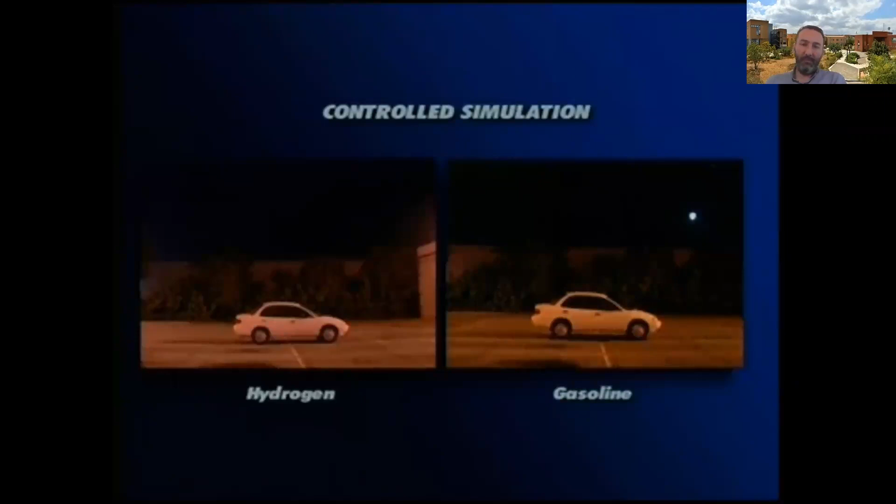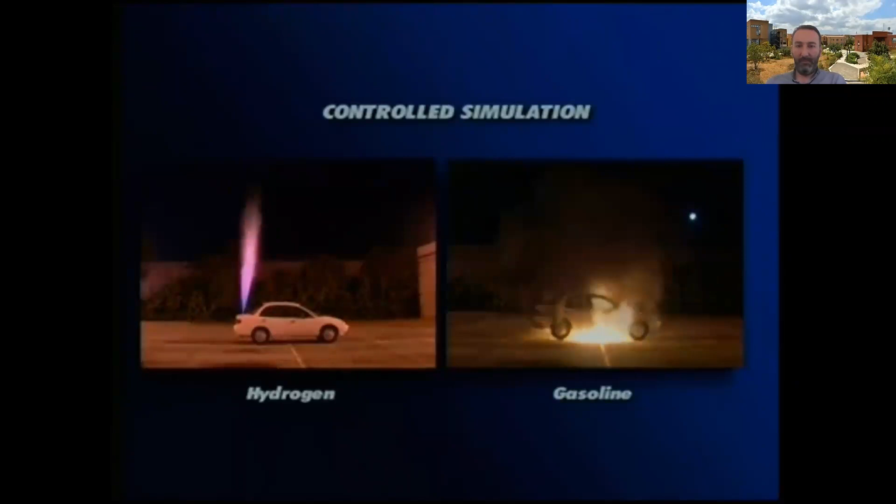So this means that hydrogen tanks are safe to use, because when hydrogen moves to the atmosphere, hydrogen is in a very low concentration. The atmosphere has oxygen at very high percentage. So only if you find hydrogen in a closed space will there be a problem. Outside, safety measurements say that a hydrogen car is less likely to explode compared to a gasoline or petrol engine.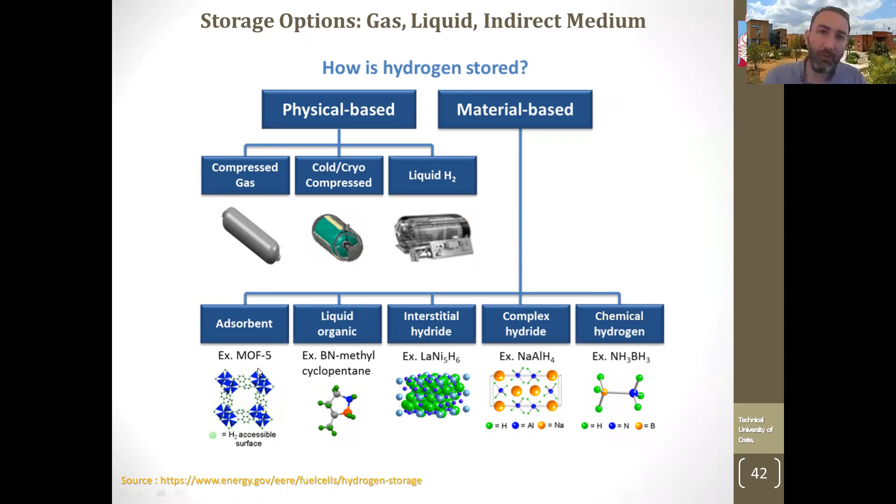But very good research is taking place, and I still believe they will have very good results with commercial cases in the next 3 to 5 years, in my opinion, of course. Okay, thank you. Next question.

Would it be possible to use part of the produced hydrogen to produce more? Sorry, come again? Would it be possible to use part of the produced hydrogen to produce more? Okay, we produce hydrogen. What do you mean by using some part to produce more? Maybe the person who asked the question could help. Yes, of course. I mean, using a portion of the quantity that we have produced and using the energy to electrolyze more.

Okay, so you mean, let's say that I have a solar panel, I split water into hydrogen and oxygen, store hydrogen, and use hydrogen in a fuel cell to produce electricity? A cycle like this, you mean? Not exactly. We produce hydrogen. Yes. We store it, let's say in 2 compressed cylinders, tanks. Yes. And we use one of them to produce more hydrogen. I cannot understand how to create more hydrogen with hydrogen. What do you have in mind?

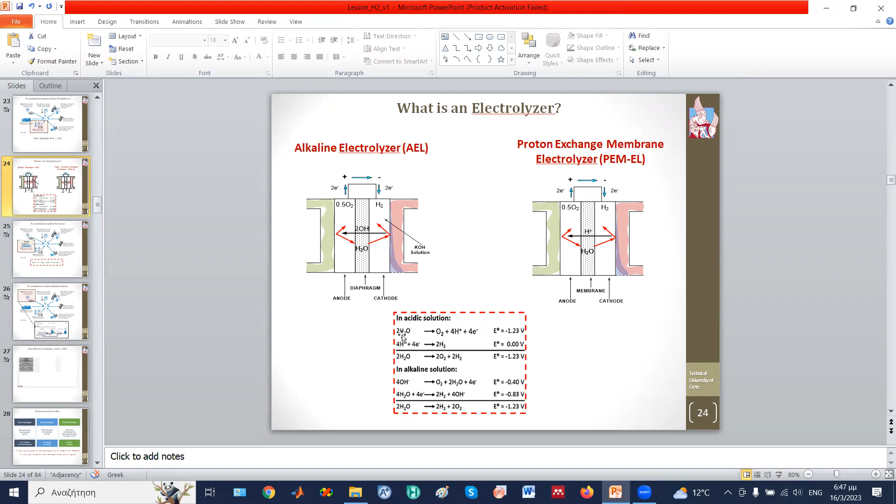The one tank will go to cars, for example, for immediate usage. Correct. And the other tank will be used to redo the electrolysis so that we can get hydrogen. Yes, okay. The electrolysis requires water and energy. Okay, so let's see it here. Water and electricity provide hydrogen. This hydrogen can be stored in cylinders and used in cars, as you correctly said.

Hydrogen cannot go back to electricity and water through water electrolysis. Hydrogen can give electricity in fuel cells, which is the opposite operation. I can use hydrogen in fuel cells to provide electricity, but my point is, since you have electricity at the beginning to provide hydrogen, you should stop here. If you are using hydrogen to provide electricity again, then you are losing efficiency.

Okay. It's a type of a cycle. For example, let's say in a typical example, I eat and then store some food to eat it again. This is the part of the hydrogen storage. If I store food to create more food, then it means that I have to spend more energy to create more food. So this means that I'm spending more money.

Okay, okay, understandable. Thank you very much.

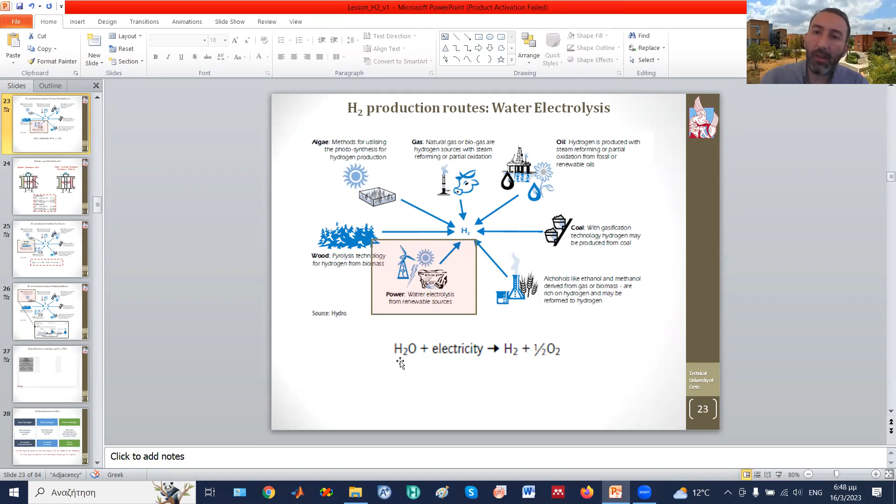In this application, yes, you can store hydrogen and use it again because you don't have another option. Okay, thank you very much.

Thank you. So now let's spend 10 more minutes on the Q&A so as to not exceed our time limit. The next question is, if you include hydrogen in a hybrid power solution, is there an ideal energy mix to optimize cost? It's a difficult answer. So using hydrogen with another type of gas, the question says. In a hybrid power solution, yes, I think that they mean that.

So probably hydrogen and methane, hydrogen and natural gas, is a good energy mix. Hydrogen in the form of synthetic gas, carbon monoxide and hydrogen, is another energy mix that can be used. Hydrogen and CO2, which is a greenhouse gas, is also another energy mix because CO2 and hydrogen can provide methane, can provide methanol. So you can combine these two as well. So yes, hydrogen can be combined with specific types of gases. And how does that optimize the cost? Does it?

You need to make a combination of the energy cost and the environmental cost. So methane is cheap. It's cheaper than hydrogen. If things go as they have gone the last 12 months with methane increasing prices, then hydrogen may be comparable in production cost with methane. Okay, this is the one part.

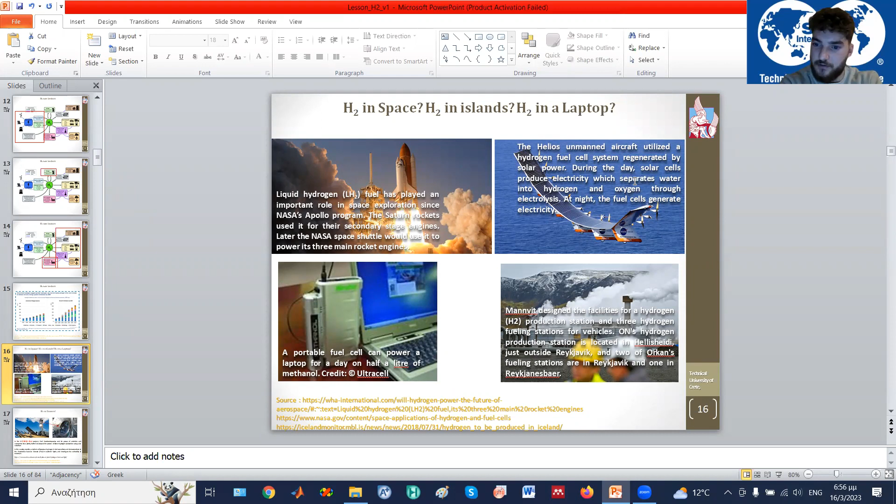Yes, for sure. So the last question. What are some of the biggest challenges facing the widespread adoption of hydrogen as a mainstream fuel source? What are the main challenges? The first is, of course, building electrolyzers for hydrogen production at low cost and in high efficiency. This is one, if we are talking about green hydrogen production.

The other one is to build good carbon capture and storage technologies and processes in order to produce blue hydrogen. I will put it on the slide. To build CCS, carbon capture and storage technologies of high efficiency, in order to capture CO2.

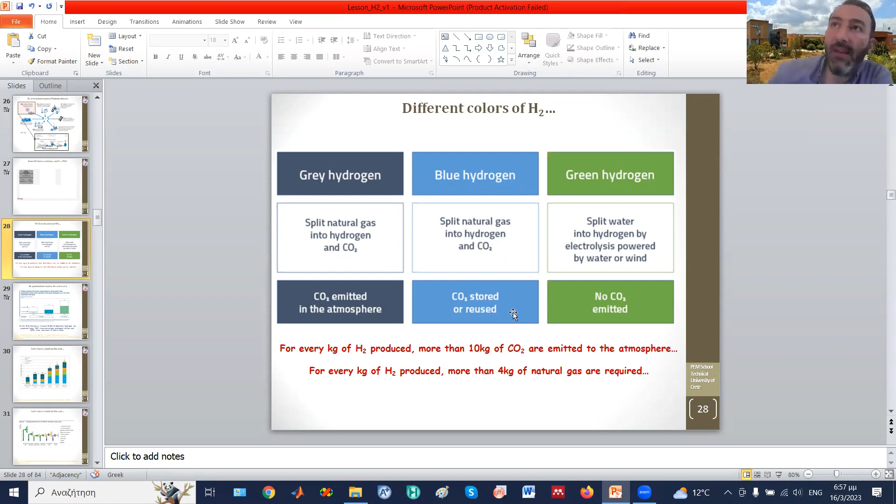But the third big challenge is to find actual applications in order to use hydrogen, not only in industry, because hydrogen is being used in industry, but we need to use hydrogen in transportation and domestic heat. These are the big challenges in order to provide facilities all over the cities. And of course, this is something that EU policy and EU governments should work together on in order to find, let's say, the space for hydrogen in daily activities.

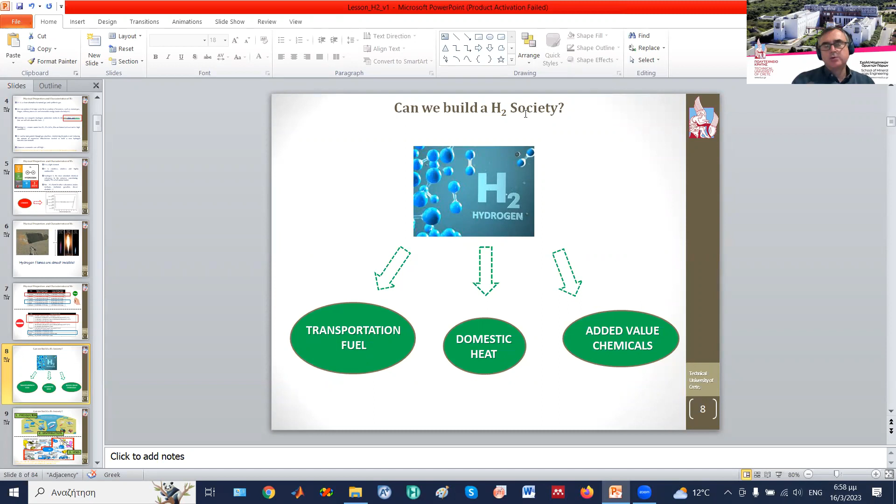May I also ask you, isn't hydrogen transfer from the production place to the consumption place an important bottleneck? Exactly, yes. You didn't mention that. Yes, I forgot that distribution is also a big factor. I will use this slide. This is in Japan. Japan has an island structure. They have a type of ship with which they are trying to move hydrogen from one side to the other.

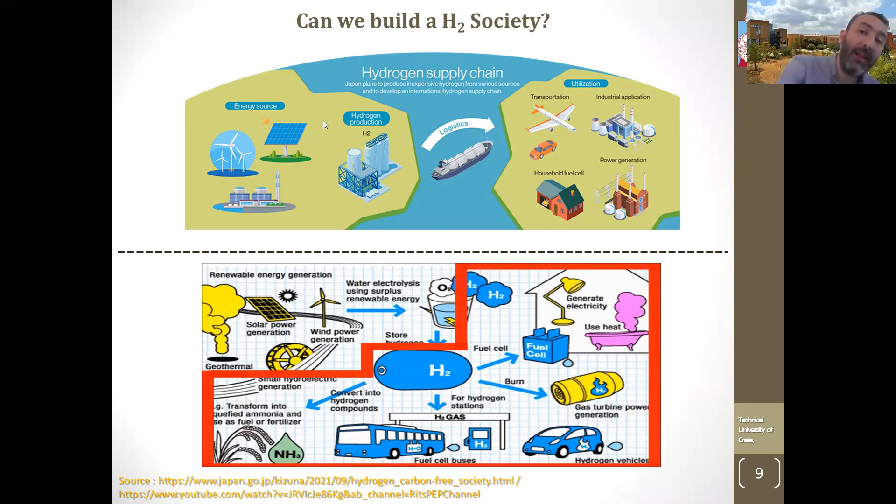I have even read some papers on delivering hydrogen from Australia in the form of ammonia. They are using hydrogen inside the ammonia in order to transfer it through ships to other places and then use it as hydrogen and so on. So yes, logistics, exactly, Andreas. Good to mention. I'm asking because it's important,

because there is a lot of discussion regarding the production of green hydrogen in countries where there is a lot of renewable energy, like sun or wind and so on, and then transporting it through pipes, or pipelines, towards other countries. What is your feeling about this? Is this possible, given the technology of today?

I discussed 4 or 5 years ago with some people in the Middle East who had experience with gas pipelines, and they were quite certain that hydrogen can be blended in a portion of 10%. I don't know. Probably yes, it is feasible to blend it. My question is, can hydrogen be inserted in gas pipelines at 100%? What happens there? Yes, because the leakage is important.

Yes, because that's an issue. Sorry to interrupt you, then you introduce another limitation. If you need to have also natural gas, then you need to buy from that country both natural gas and hydrogen. Exactly. Okay, so the country should be a producer of both natural gas and hydrogen. And this is away from the carbon-free concept of economy. So it is 90% carbon-based fuels.